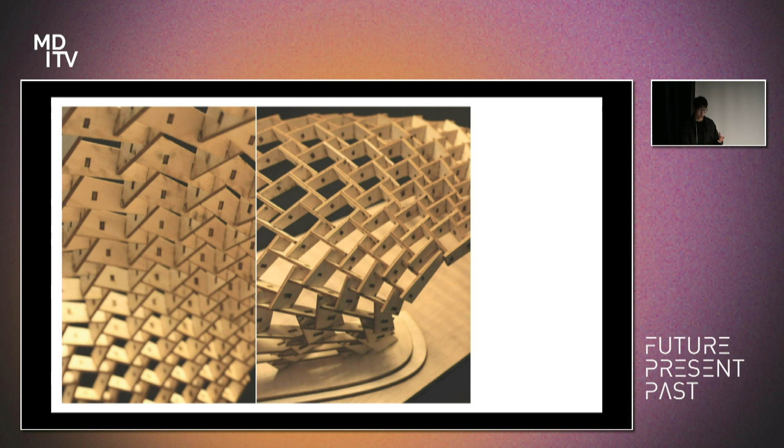So I'll start with a little bit of myself. So I was trained as an architect, and during my studies and practice I became very interested in digital technologies and the power that they bring to us as designers. So, for example, the different quality of space when we combine digital space and physical environment, and also the making, the new possibilities that it can bring back to some old construction methods.

And here are some of the teaching outcomes we used to achieve at MDIT. Lawrence and Jeff will remember this structure. That's in the sound studio. So here are more teaching outcomes from the digital fabrication stream. So we make really complex things using the digital fabrication and computational design tools.

So basically, I became very obsessed with the digital tools and all the possibilities that they bring. I feel very empowered. I can almost make everything, until I started working to the next stage and constantly got asked the question, like, why? Why are we doing these things? It's cool. So I also want you, as young designers, to start thinking, well, we can almost build anything, but should we? And what are the meanings behind the things that we make?

As we touched on earlier, circular economy is important, and as you know, globally we're facing a lot of climate challenges, and some of the quotes are indeed quite scary, like we don't have much time left to fix anything, if we can fix it. And being an architect, I'm very responsible, as the building industry is a heavy contributor to all these problems. Yeah, we generate a lot of energy consumption and put a lot of waste into the world.

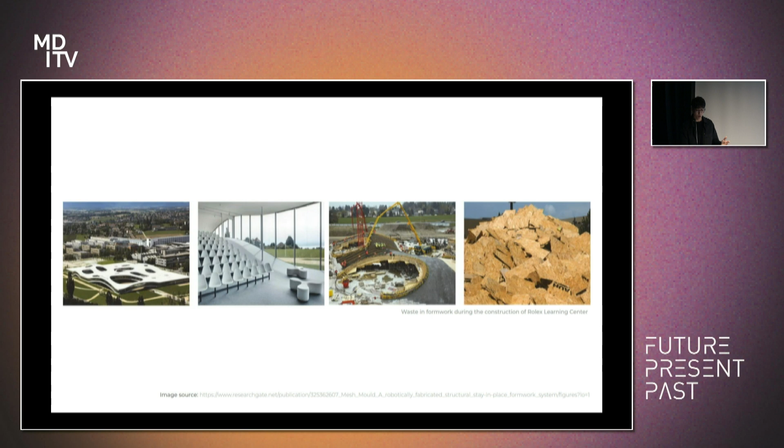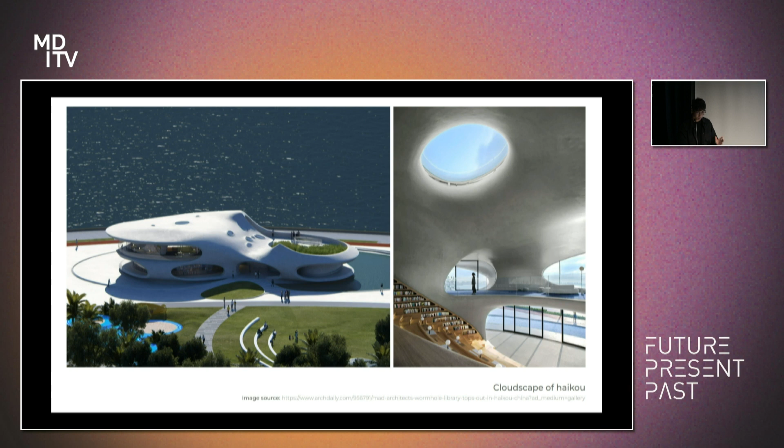And sometimes the digital technologies can give us the ability to design amazing buildings, good for humanity. But once you start thinking about the making process, you realize, wow, to make something complex could lead to a very wasteful process, like one-off formworks, for example. Here's a recently finished building by MAD Architects in China. It's a fantastic building, absolutely amazing. But if you dig deeper, you start questioning some of the decisions.

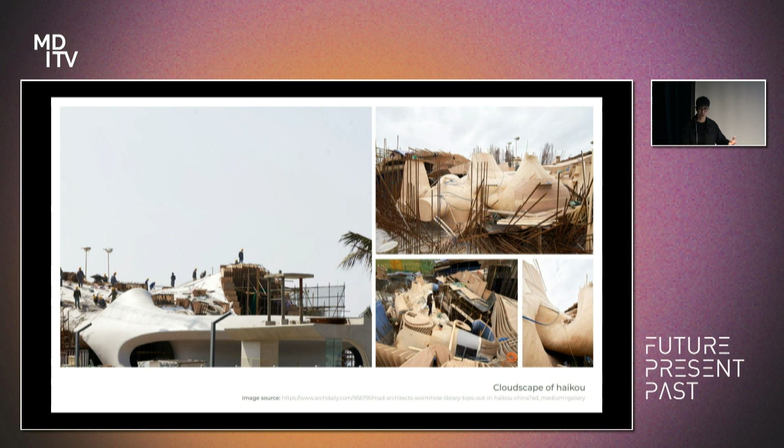For example, here you can see the construction company or the architect decided to almost build the building twice. You build it in timber, cast it in concrete, and you throw the timber version away, in landfill, I assume. Even with some of the advanced digital design techniques, for example topological optimization, which is meant to take away material to increase efficiency, so you save material by using less. But if you look at the making, there's always another layer of complexity and waste associated with making these things.

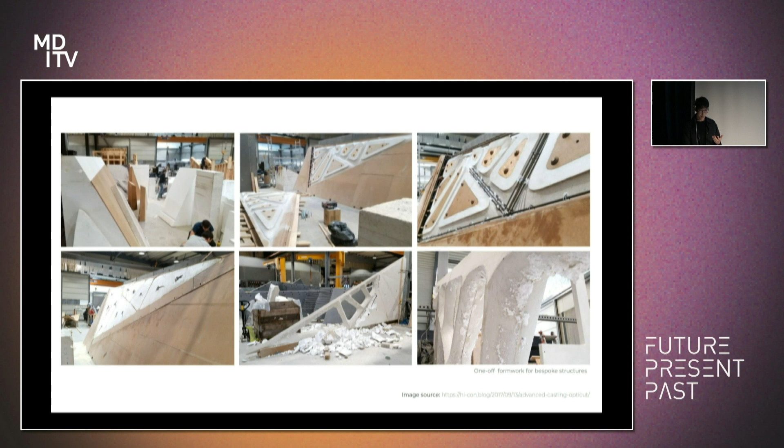So my personal research, yeah, again, with digital industry 4.0 and digital technologies, we can almost make anything, absolutely anything. But should we? So my research looks at the intersection between computational design, digital technologies, and how these tools help us to work with the principle of circular economy and try to keep doing cool things that we like to do, but in a more responsible way. I won't go too deep since it was very well covered in the Cradle to Cradle book.

So basically, circular economy promotes, instead of the linear take, make, waste, trying to keep everything in the loop: reuse, repair, and relook at ways to bring a second life to things. So how do we do this using the technologies that we have? So particularly I looked at upcycling and biofabrication, and today I'll focus on the upcycling part. So computational design and the modeling tools that we use are very powerful. They allow us to work with a lot of constraints and deal with complexity in a systematic way.

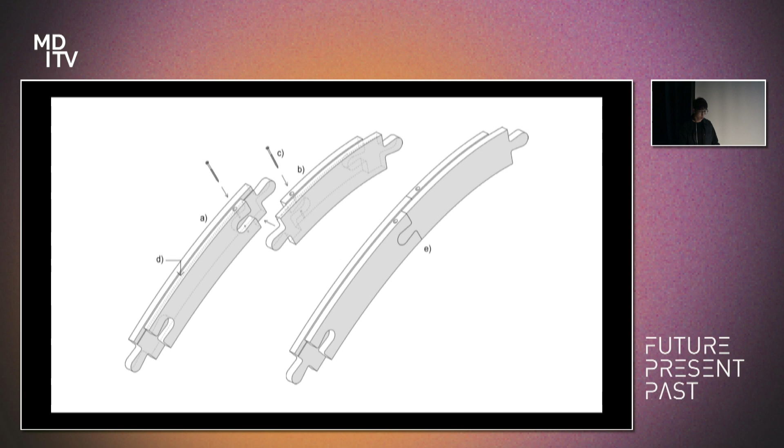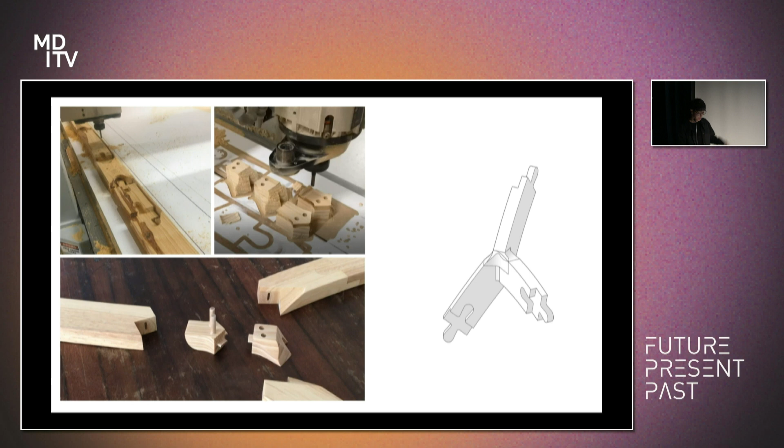And the rest is about the detailing. We're using lap joints and a little groove channel on the top of each beam for cladding, and all the complex nodes were broken down into planar elements, which can be easily machined using a 3-axis CNC machine. You can see here's a detailed image. And the pavilion was then put into a few suitcases and boxes and traveled to Barcelona with us.

And then it was brought back to Melbourne University for the future prototyping exhibition. And then after that, it was again sent to Queensland for another exhibition. So it's a very well-traveled pavilion indeed. So that's a smaller scale.

So as we progress, we keep thinking, well, can we upscale this and turn it into something that can even go beyond a standalone pavilion structure? So I'll show some of the tests that we are trying to push in this line of thinking.

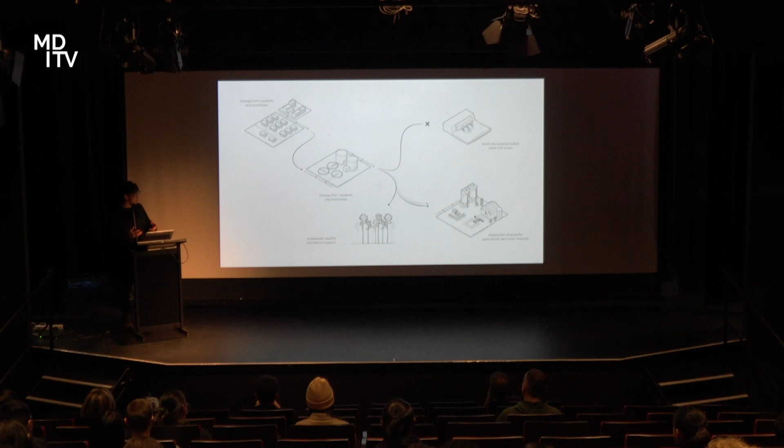So in this next project, we were working again with the Australian timber plantation, which is grown in Hervey Bay in Queensland, using recycled water. So the company is called Wide Bay Water. So they take all the Class B recycled water from local business like households and the shops, and then they process the water, and instead of ejecting the treated water into the ocean and polluting it with chemicals, they redirect the recycled water to grow gum tree plantations.

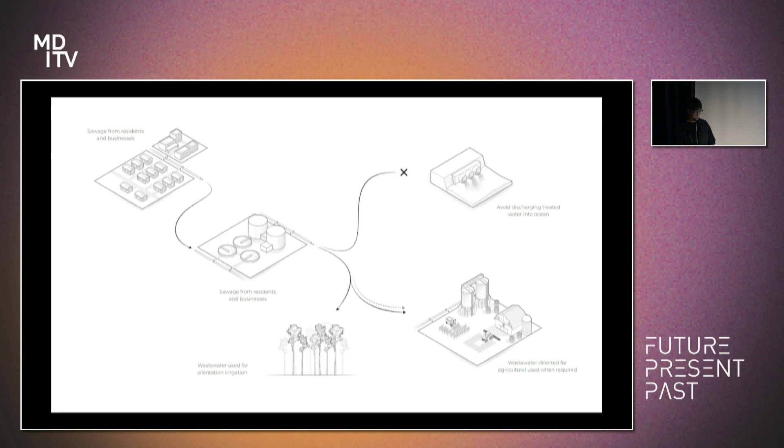And the plantations are very good at going through a small period of drought. So when local farmers need the water, they can always direct the water and sell it to the farmers. And when the farmers don't need it, they will use the water to irrigate the plantation of the gum trees. Here's a picture of the plantation.

So the issue they have was, in plantation, at the beginning of the planting of the trees, they plant them in a really tight grid so that they force the trees to shoot up really high to compete for sunlight. So at year 10 to 18, they will go through a process called plantation thinnings, where they go in the forest, identify almost every second tree that isn't growing very well, the thin ones, and chop them away to give space for the rest of the healthy trees to grow in diameter.

So I think the criteria was the tree has to reach around 250 millimeters in diameter at roughly 15 meters height. That's when it's deemed to be usable for future harvesting. The rest, again, no one knows how to use them. No one wants to buy them. So they always lose money. The plantation's losing money just to get the workers to come in and remove the trees.

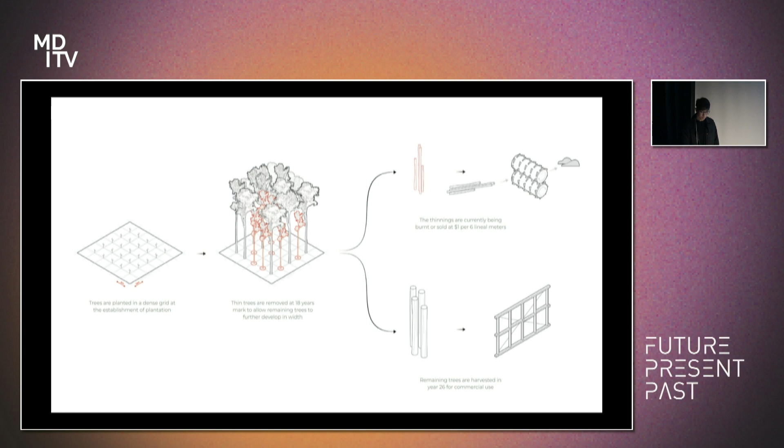And you can see there's some of the quotes from them. It's being sold at $1 per 6 linear meters. It's basically almost rubbish, for free. So here's what they look like, the thinnings. So again, based on this very unique product, we then tailored our computational design approach to be able to utilize this very unique material.

So here's the computational demonstration. So we decided to design a truss, branched structure. So again, it's a flexible system where, with a given length of tree, the algorithm would distribute the length over this branched structure and always try to match the exact length. So that gives us a chance to work with whatever tree we were given.

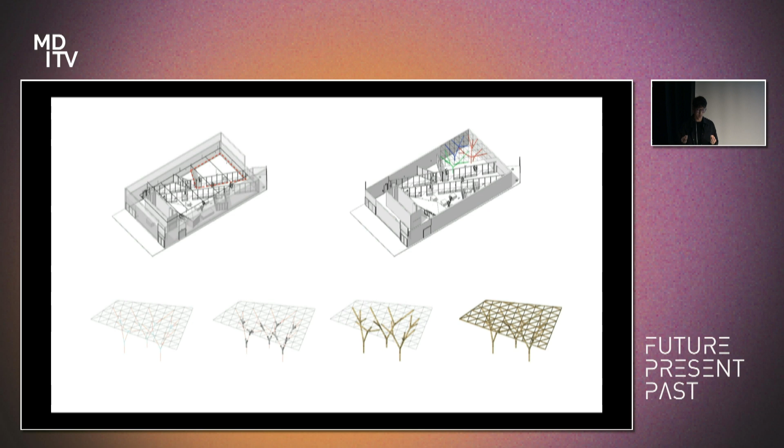So we were given a chance to design a demonstrator in the Queensland State Library. That's the site. And we purposely decided to use a very regular roof grid on the top in hope that if the prototype works, we could potentially try reimagining it in a more non-pavilion typology, connecting with regular roofs, walls, etc. So here's a scale model before we build it.

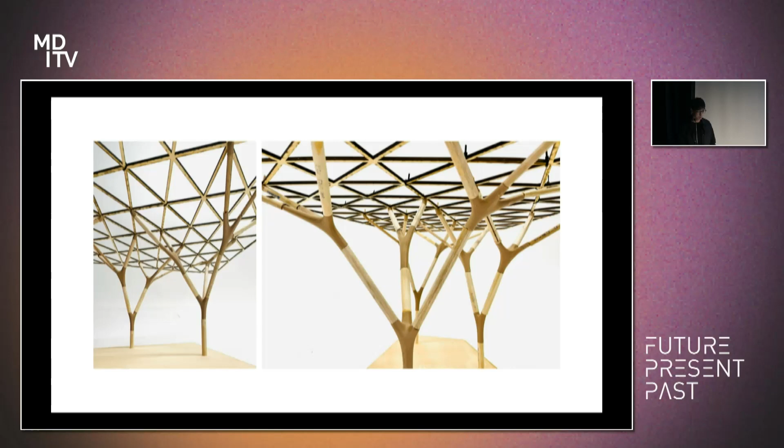So again, the algorithm was further refined, so the algorithm will always snap the endpoints of the truss structure to the given grid and also match the tree lengths that were given. And then it will go through a structural optimization process, where the weight of the roof grid and the self-weight of the branches will be embedded into the computational model, and the model will keep the design but shift the nodes to achieve a structurally more efficient form.

So here you can see there's a little adjustment based on the weight and the structural analysis under both tension and compression. And it then is further verified in structural simulation tools.

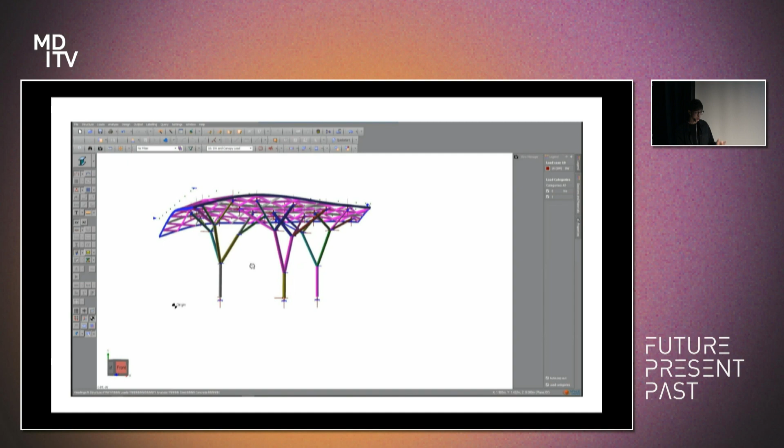So here's the fun bit. So we decided to push the project to the extreme, and we did a real-time test. So one morning, one of the team members, Kim Baber from Queensland University, went into the forest. They identified a few trees and chopped them in the morning, those thin ones. And then he sent me a few text messages while I was in front of the computer, nervously waiting. So these are all the information that we needed: tree ID, the length, diameter.

And I was working with Joe Geddes, a structural engineer at Queensland University. Real time, we're updating the script. It was very nerve-wracking because we always worry about what if we make mistakes. One little calculation that's wrong, nothing will match, and then we waste a few trees. It was actually very scary because I did find a little mistake in my script, which made me nervous for a few months until the pavilion was built.

So in the morning we received the information, we updated the script using that information, and in the afternoon that's all we sent back. An A4 piece of paper telling the guys where to cut and where to mark. And then that's them in the afternoon, rushing us. The sun's going down, it's dangerous to use the chainsaw. Can you guys hurry up? Yeah, it was quite a nervous day.

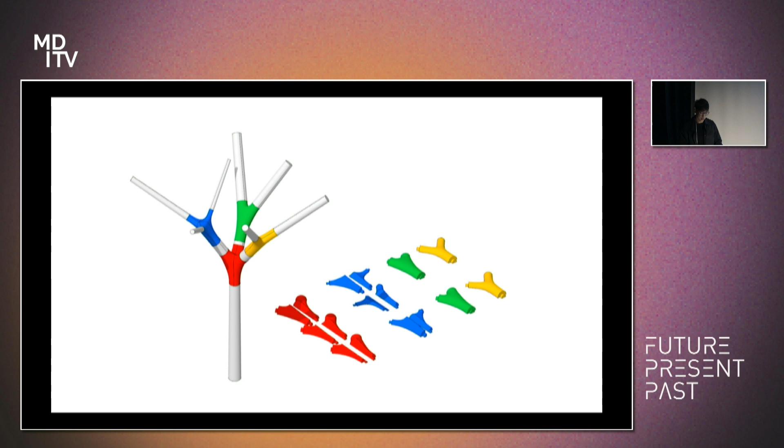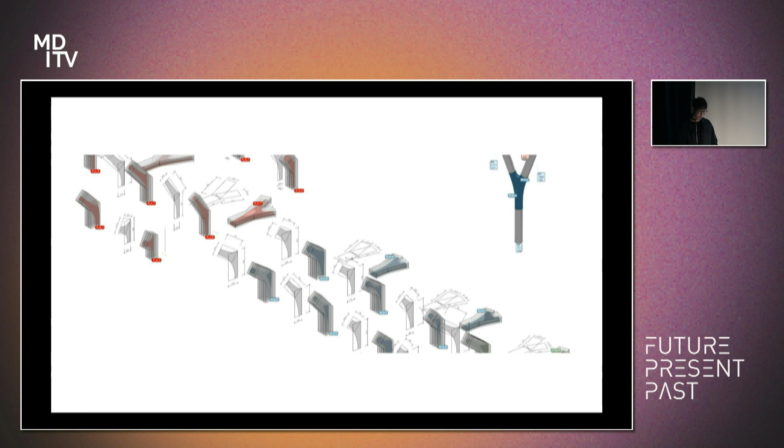So then we thought, oh, we should push this even further. Why can't we use recycled material for the node? So we were donated some off-cut LVLs, again, short length timber, for the node. So we matched every single one of these segments onto this LVL node, which ranges between 600 to 800. I think the max, they say, don't go over 1 meter. And yeah, so every node was constructed with this LVL and then smoothened later. I will show in the next few slides.

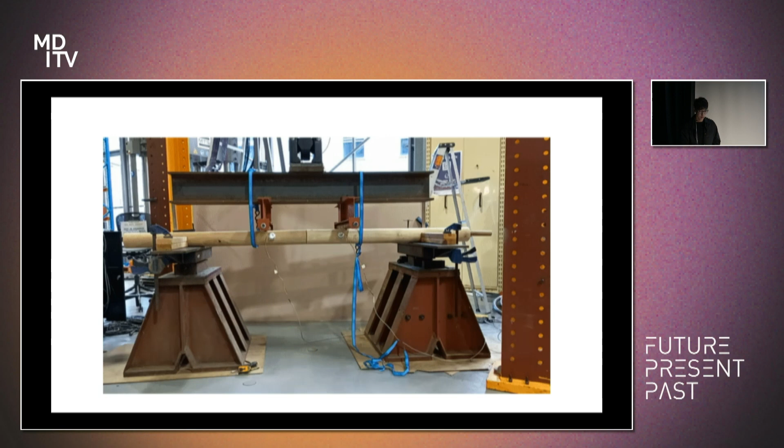And for the connection, we tested different methods, whether timber dowel, with screw, without screw, plywood connection, and the conclusion was the timber dowel with screw was sufficient for the self-weight. So here's the node that I mentioned that was built with recycled LVL offcut. They were first glued together and then chopped just by a little bit. So then in the later machining process, we're not cutting a whole large chunk of timber, but just a little bit of sculpting. Again, trying to minimize the waste involved in the process.

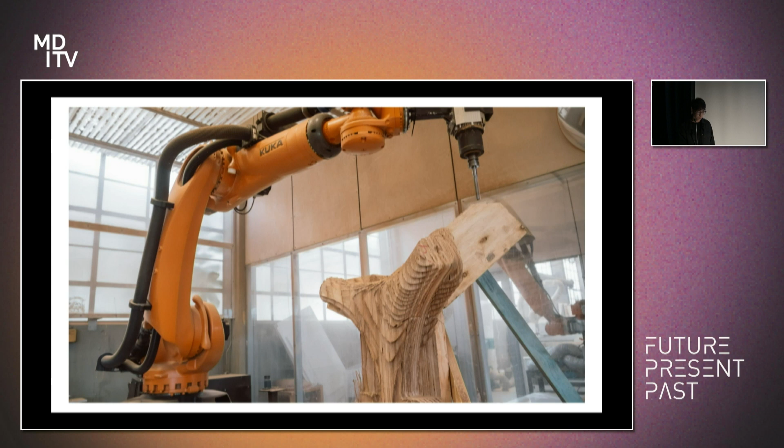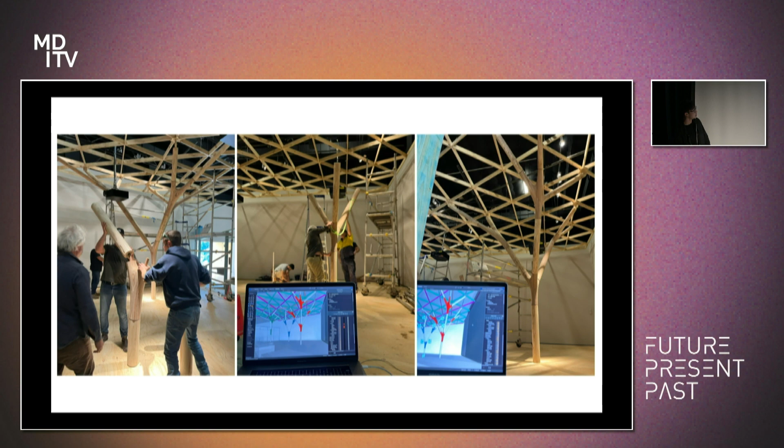So here's the scale of the node. You can see it's about this size. And very interestingly, the fact that we were using the LVL as a donated material also gave us a very unique sense of aesthetic. So the design aesthetic was also an element that we didn't really envision, which was a very pleasant surprise. And here's the construction process. The whole pavilion was built in roughly 2-3 days. Just a few of us, all by hand, very easily put up and connected. And that's the final product.